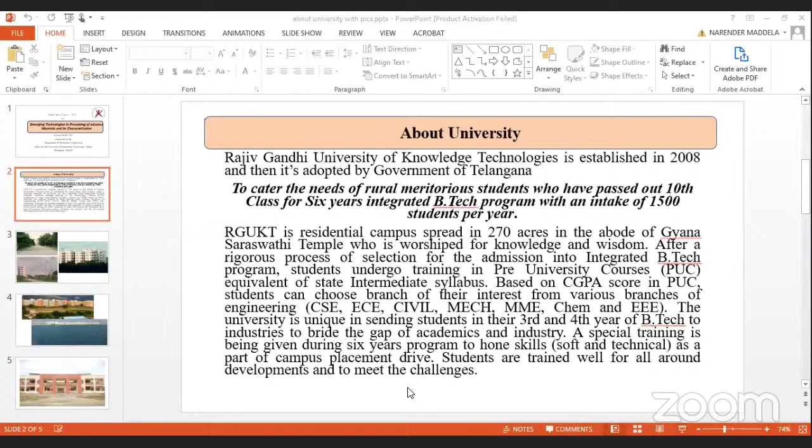Hello. Yeah, hello. Can you hear my voice? Yes, yes, we are able to hear you. In just another 2-3 minutes, we will try to start the program. Yeah, sure, thanks.

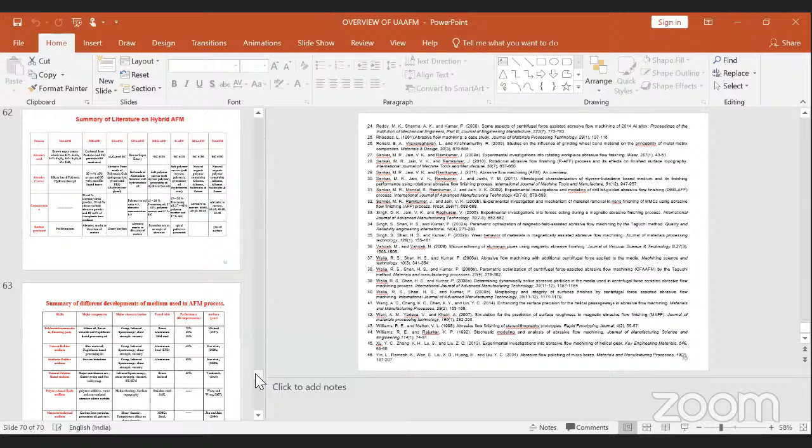Thank you. So, good afternoon, one and all. I would like to share my screen. Narendra sir, you stop sharing your screen so that I can share. Yes, sir. Venkatesh sir, you can now share your screen. Yeah, sure. Are you able to see my PPT? Yes, sir.

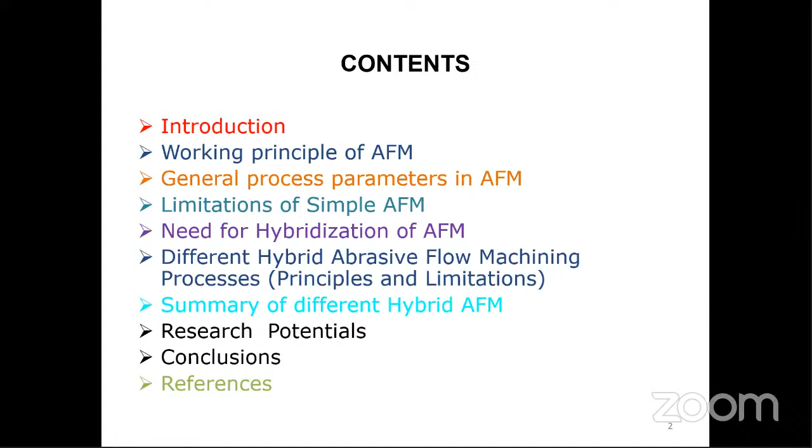So let me explain the principle of AFM. The principle of AFM is very simple. One can develop this setup at laboratory scale, in the machine tools lab or in a workshop. But its functioning and capabilities are really amazing. The principle is pumping an abrasive laden medium through or over the component to be finished, and the medium is pushed by means of two hydraulic cylinders.

Here in the figure you can see hydraulic cylinder 1 and hydraulic cylinder 2, which are connected to a hydraulic setup. We require two hydraulic cylinders placed opposite each other, and in between we have the tooling or fixture. The purpose of this tooling is that it holds the workpiece and also guides the abrasive laden medium to and fro through the target surface.

Here in the figure, this is the workpiece, fixed in the tooling. It looks like an external surface; it's a turbine blade, with some complex geometry involved. The tooling holds the workpiece and guides the medium through the target surface. If you take the inset of this workpiece, the abrasive laden medium consists of abrasive particles mixed with a viscoelastic carrier, and this carrier carries the abrasives and abrasion takes place.

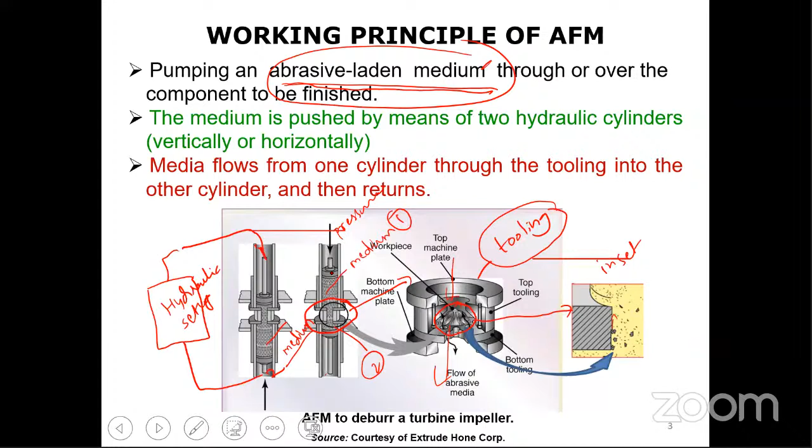So pumping the abrasive laden medium from one cylinder to another cylinder, passing through the target surface; once the medium travels from one cylinder to another, it is considered as one cycle. If you increase the number of cycles, your finishing will also increase.

Now let us see what that medium is in detail. The medium is the most critical component in this process. It is a combination of a viscoelastic carrier with special rheological properties. This viscoelastic carrier is something like silly putty, which we use for manufacturing toys, and also something like natural rubber, and you can also get synthetic rubbers from companies.

It is a viscoelastic polymer, a polymer with special rheological properties, meaning it is spillable in nature. If you put this polymer in a glass, it occupies the glass shape, and if you put it on a plate, it occupies the plate shape. So it is spillable in nature and very, very flexible.

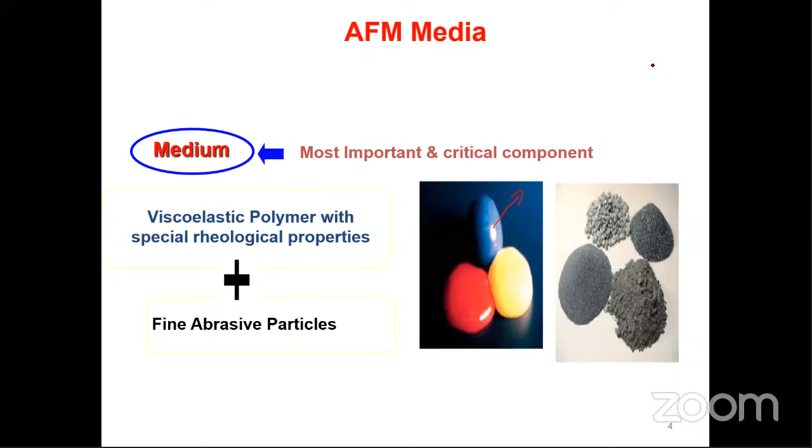We combine this polymer with abrasive particles. Generally used abrasive particles are silicon carbide and aluminum oxide, and we also use diamond powder for finishing advanced materials. You can see a realistic image where we prepared abrasive medium with these special rheological properties.

The commercially available polymer we call polyborosiloxane. It is made of silicone oil mixed with some chemicals. It behaves like rubber, viscoelastic in nature, and this material is mixed with abrasive particles so that it becomes a carrier for removing material, and it can travel through complex geometries, intricate geometries, and fine geometries like small micro slits and micro holes.

For example, we all know there is a small hole in a needle, right? If you want to finish that small hole, this is also possible. So micro holes can also be finished. AFM can be used for finishing, deburring, and radiusing. If you want to remove burrs, you can use the AFM process, and if you want to radius an already existing hole, you can use this AFM process.

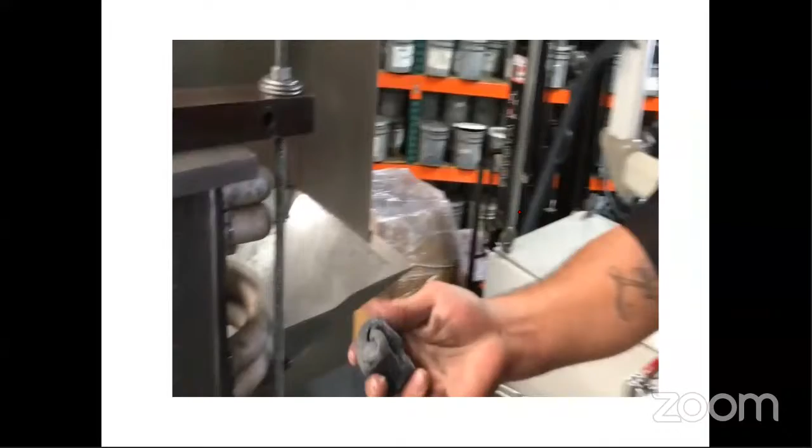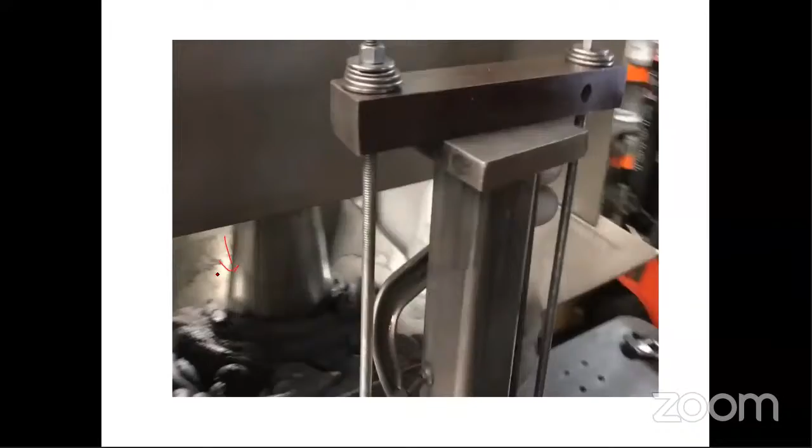So far we have discussed the principle of AFM and the main parts: the medium, the tooling, and the machine. In the working video, you can observe the behavior of the medium I am talking about. You can see the viscoelastic polymer mixed with the abrasive particles, and here they are pressurizing the medium, applying extrusion pressure for cleaning manifolds used in automobile components.

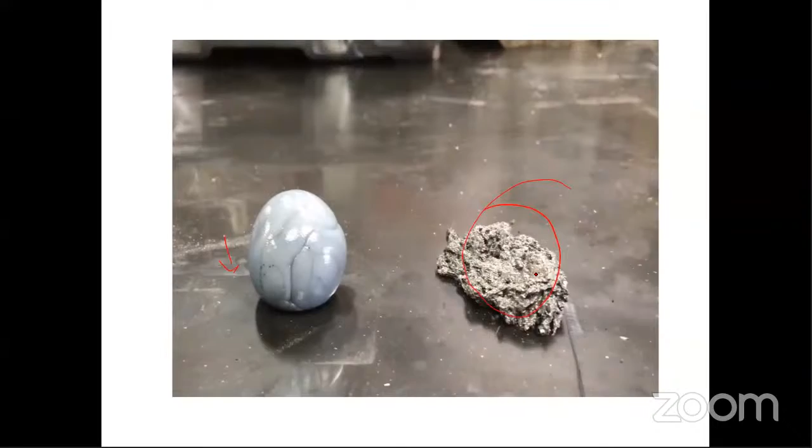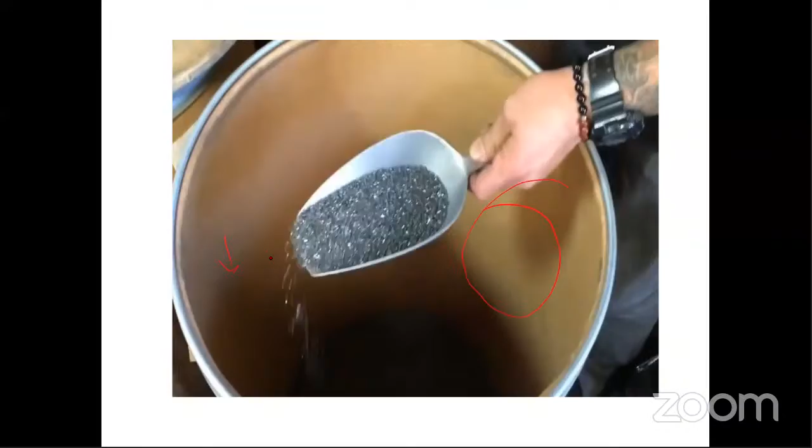So there are several grades of abrasive particles with different mesh size. So this is the polymer medium I am talking about, and this is after machining, and this is before machining. After machining, you can observe that it will be degraded, after doing proper abrasion. So these are the abrasive particles I am talking about.

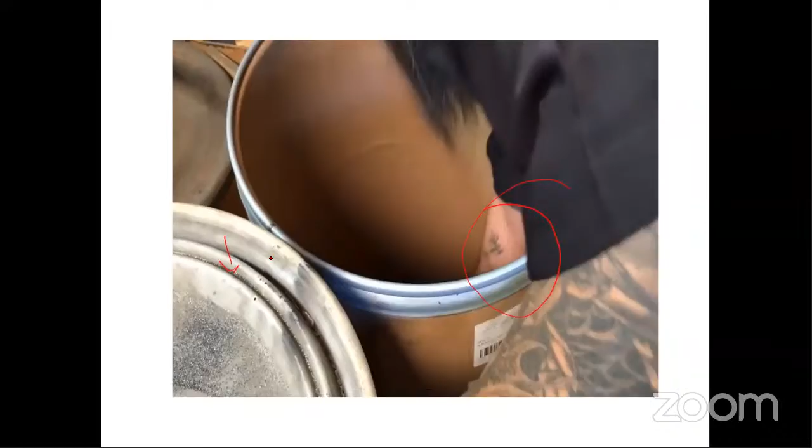So several grades are available at different mesh, like silicon carbide and aluminum oxide, which are very commonly used abrasives. So mesh size and concentration are some of the important parameters which influence the finishing. So these are fine silicon carbide particles.

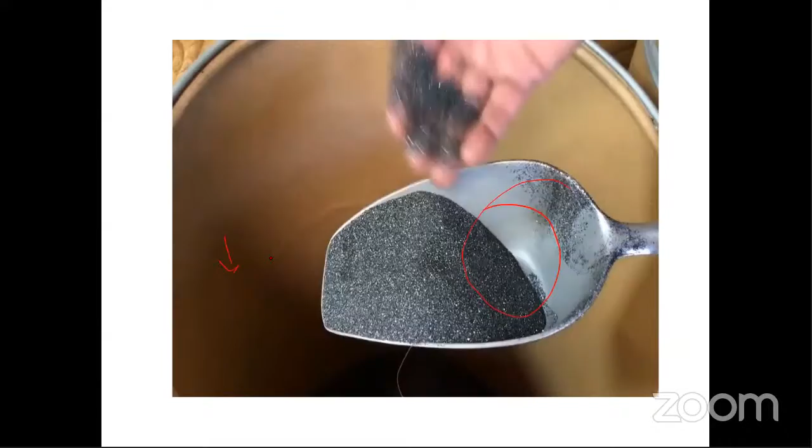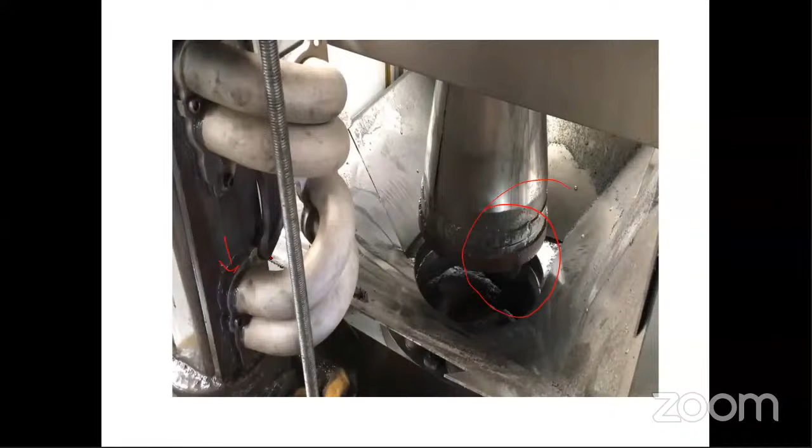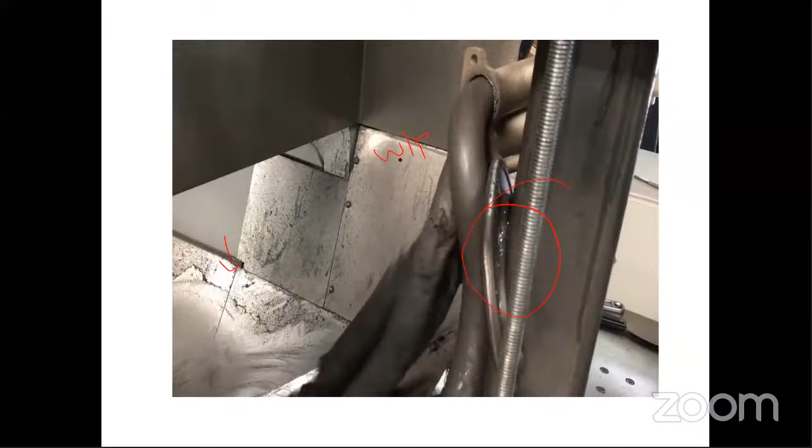Here you can see the performance, where this is applied and what is the actual function of it. So here, the medium is extruded by applying certain pressure, and the workpiece is here. In this video, the workpiece is a manifold, and you can see the media is extruded from the holes. We can say these are complex holes. These are not easy to

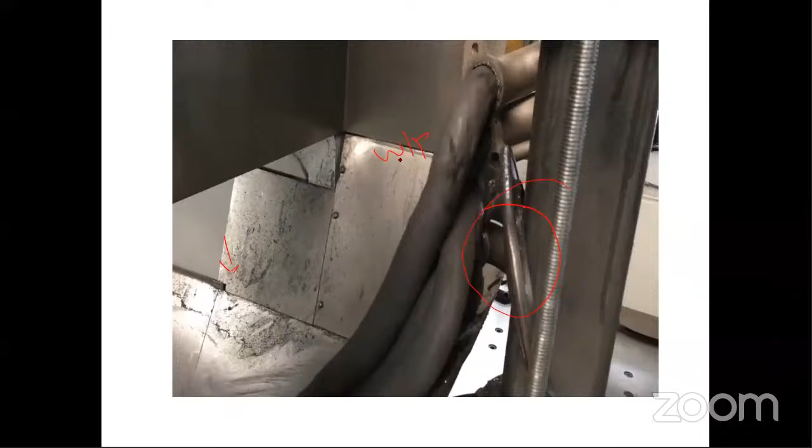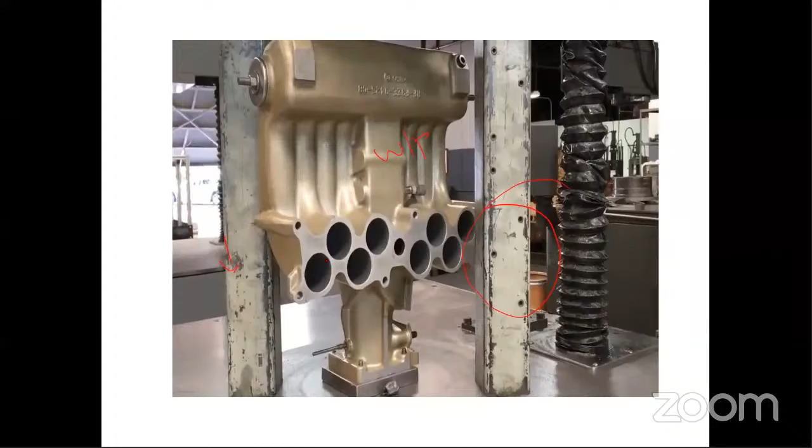finish using grinding, or it is radiusing the holes, and the metal which is removed from the workpiece is again mixed with this abrasive laden medium. So this is the final output. You can see the finishing before and after. So we all know the function of finishing, right? If the finishing is good, then the fatigue properties and creep properties will increase, and also the functionality of the product will increase.

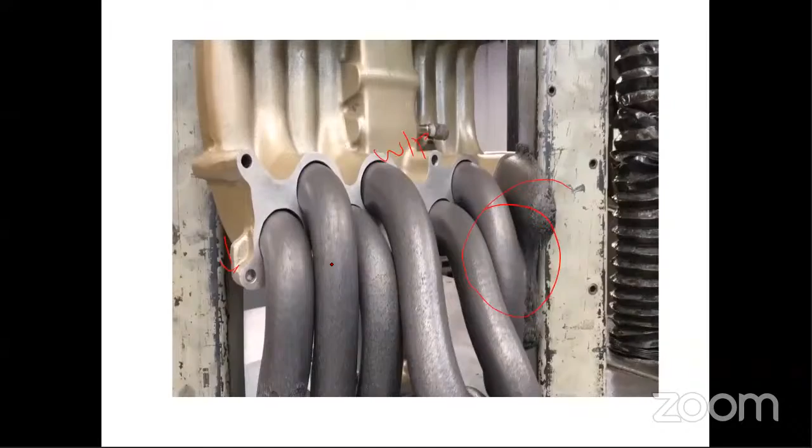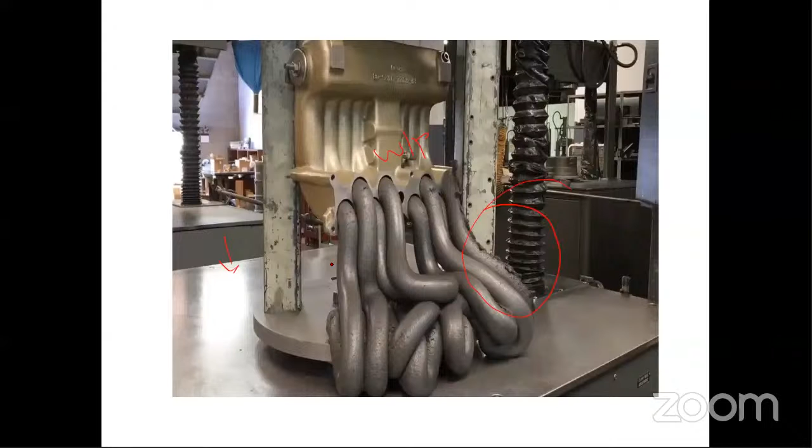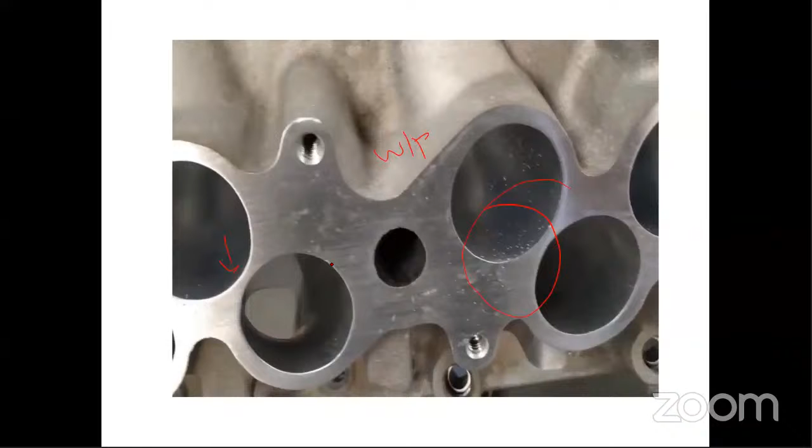Especially for parts used in automobiles, which are subjected to continuous loading, or parts used for medical implants, etc., where high-end finishing is required, finishing up to nano level, this process is very much applied. So here you can see the finishing before and after. There are multiple holes, irregular shape holes, and finishing at a stretch, radiusing and removing of burrs at a time, we can do using the AFM process. So this is one of the advantages.

So coming to the next important part, which I already discussed, that is tooling. Tooling is one of the important parts. It is generally for internal surfaces, and for external surfaces we need to develop separate tooling. So here you can see this cylindrical bush. Our target is to finish the internal geometry of this cylinder workpiece, and these are the tooling. These are used to hold the workpiece as well as to guide the medium through the target surface. And in this picture, this is for external surface. We developed this for the hybrid AFM process that we'll be discussing in the next slides.

So in this process, we have a restricted passage in order to get the advantage of pressure and velocity changes, and we got better finish by restricting the passage of medium, so that more pressure is applied and more finishing will take place. The material we generally use is nylon and Teflon for developing this tooling in order to finish the external and internal geometries.

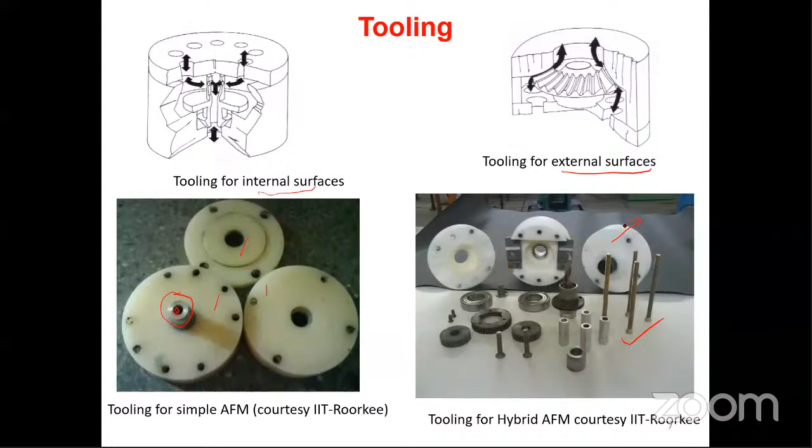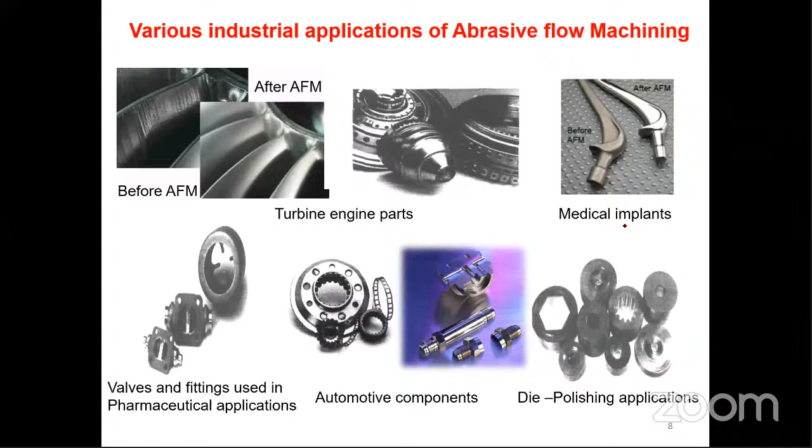So generally the various applications include turbine engine parts, medical implants, automotive components, die polishing applications, and aerospace applications, etc. AFM is very commonly used. What are the main important parameters in AFM? As I said, machine, medium and tooling, right? These three are the main parts in AFM.

So for machine related parameters, we can control extrusion pressure, number of cycles or processing time, and flow volume and its speed using the machining setup. And abrasive medium related parameters are medium viscosity. As we are using a semi-solid medium, the medium viscosity plays an important role in finishing. Also medium rheology, abrasive type, size, and concentration we are using for finishing.

And for tooling, the workpiece configuration, restricting passage length and area. As I said, if you restrict the passage, there will be a change in the pressure applied and velocity, and that gives rise to change in the finishing area. Next is workpiece hardness. So these are a few important process parameters in simple AFM.

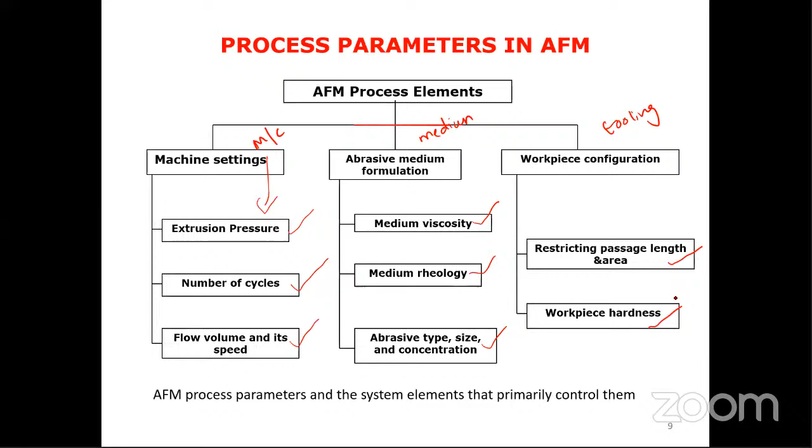So what are the advantages and limitations of the traditional AFM process? As I discussed, the major important part is to finish inaccessible areas, like we have seen the finishing of the manifold in the video.

Which is a part of an automobile car. So how to finish inaccessible areas? You can also finish the internal dimension of a nozzle, you can also finish a turbine blade, and you can also finish a blind hole.

There are many advantages of using AFM which cannot be achieved using traditional finishing processes such as honing, lapping, and grinding. Another advantage is finishing complex internal passages of components, and it saves up to 80% cost of final finishing compared to manual operation, and is easy to operate. Components can be finished with high tolerance. So these are the advantages.

And what are the limitations? One limitation is low material removal rate and low finishing rate, and it increases the processing time.

So even though AFM is a very good process which can finish inaccessible areas and complex geometries, it suffers from low finishing rate and low material removal rate. This means it takes a lot of time to finish, and the number of cycles required is more and more.

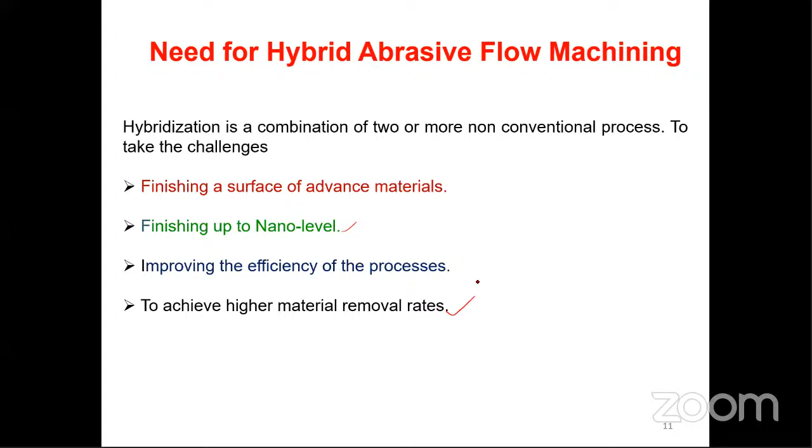Next, finishing up to the nano level. Initially AFM was used to go up to the micro level, and that can now go up to the nano level, even the Angstrom level. So they are working on reaching the nano level and Angstrom level, improving the efficiency of the process to achieve a higher material removal rate. These are the reasons why people started developing hybrid AFM processes.

And what literature is available on AFM and hybrid AFM? We now know what simple AFM is and its advantages, how it differs from other processes, what the important parts are, what the process parameters are, and what the applications and advantages are.

Let us see what this hybrid AFM is. Hybrid AFM is further divided into magnetic-based AFM, chemical-based AFM, centrifugal-based AFM, rotational-based AFM, and ultrasonic-based AFM. Hybridization means combining two or more energy sources in order to get an additional advantage by combining these processes.

Magnetic-based is further divided into magnetic assisted abrasive flow machining and magneto-rheological abrasive flow machining. Chemical-based includes electrochemical machining. Centrifugal-based includes spiral assisted abrasive flow machining and centrifugal assisted abrasive flow machining. Rotational-based includes rotational assisted abrasive flow machining. And ultrasonic-based includes ultrasonic assisted abrasive flow machining and ultrasonic flow polishing.

Now let us see one by one what the advantage of each process is, what the principle of these processes is, and how the finishing rate and material removal rate have been increased using these processes. We'll discuss.

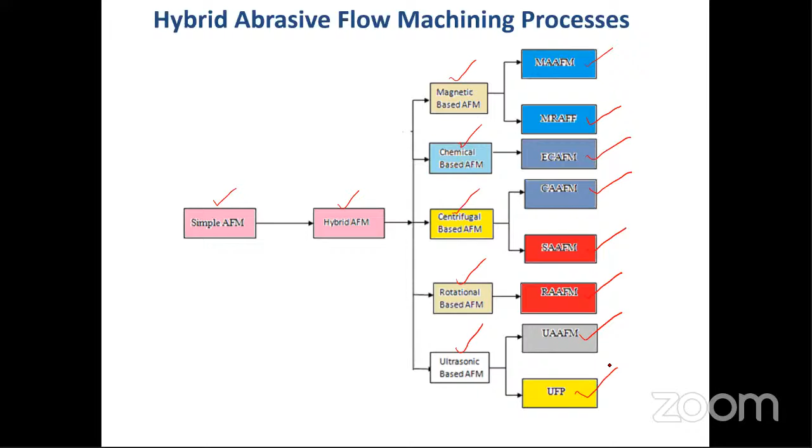First, Jones and Hull in 1998 introduced ultrasonic flow polishing. Actually, AFM was first developed in the 1960s by Extrude Hone Corporation, USA. After that, the first variant came in 1998, when ultrasonic energy was incorporated with AFM, combining AFM and USM, which he called ultrasonic flow polishing. In this process, the abrasive polymer mix is pumped down the center of an ultrasonically energized tool.

The principle is simple. He pressurized the medium using an extrusion pressure, and also actuated the medium using an ultrasonic tool. He energized the medium by giving ultrasonic vibrations to it, and achieved better results compared to simple AFM. He also recorded a better material removal rate compared to simple AFM in his research work.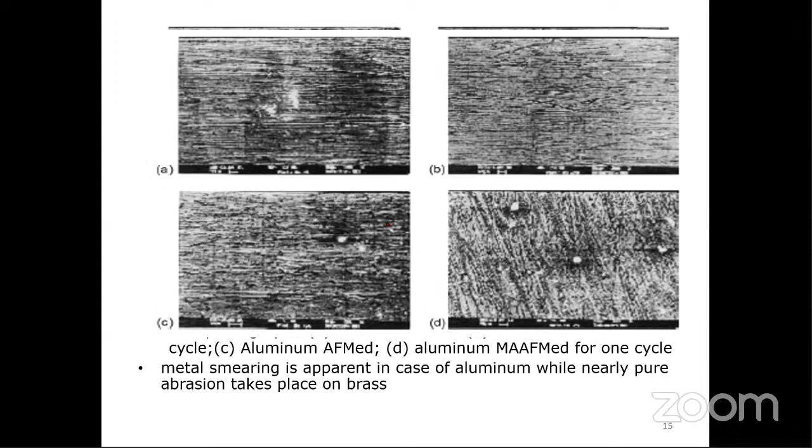Magnetic field is applied using electromagnet coils, and the difference is here. Due to the magnetic field applied, CIP chain formation takes place, which improves the active abrasive grain density in this process. If the abrasive grain density increases, then the finishing rate also increases.

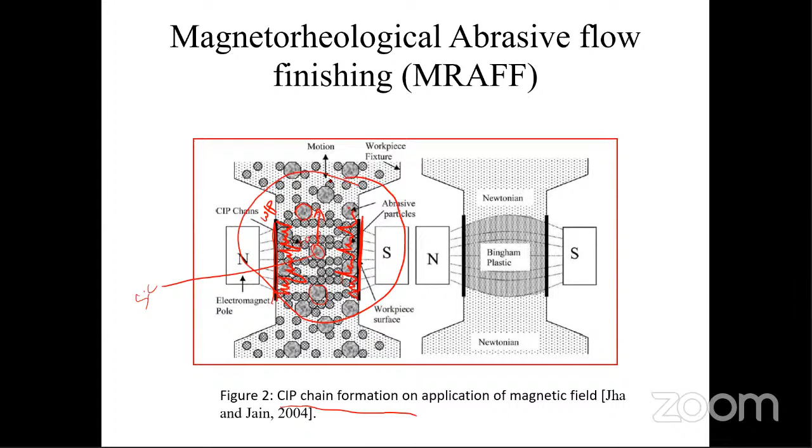Here you can see the abrasive particle and the chip flow direction, and this is the asperity I'm talking about. So this CIP chain will help increase the axial force as well as the radial force. So the resultant has increased, and you can see the microchip cutting of the abrasive particle with the surrounding carbonyl iron particles, which leads to higher material removal rate and higher finishing rate.

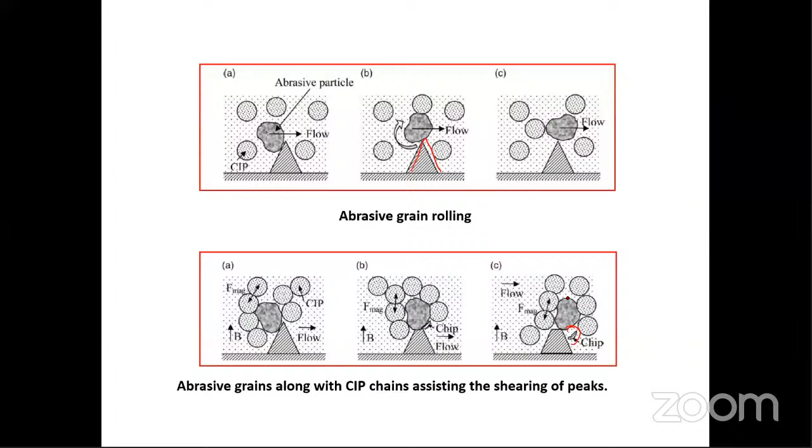Next is rotary abrasive flow machining. So he has used one spindle, inserted it in the medium, and rotated that spindle. The other principle is simple: it consists of two hydraulic cylinders passing the medium from one cylinder to another. The remaining principle stays the same. The difference is he used one spindle and rotated it, and due to this rotary action, the protrusions of the abrasives are everywhere, and the abrasive interaction with respect to asperity has increased due to this continuous rotation of the spindle inserted into the medium.

Next, another scholar in the year 2006 introduced a centrifugal force. This is one of the tricky processes. You can see he designed a lot on the tooling. He did not use any magnetic field. He developed a special tooling for this centrifugal assisted abrasive flow machining, and introduced centrifugal force around the tooling, and due to that centrifugal force, the abrasive interaction with respect to asperities has increased.

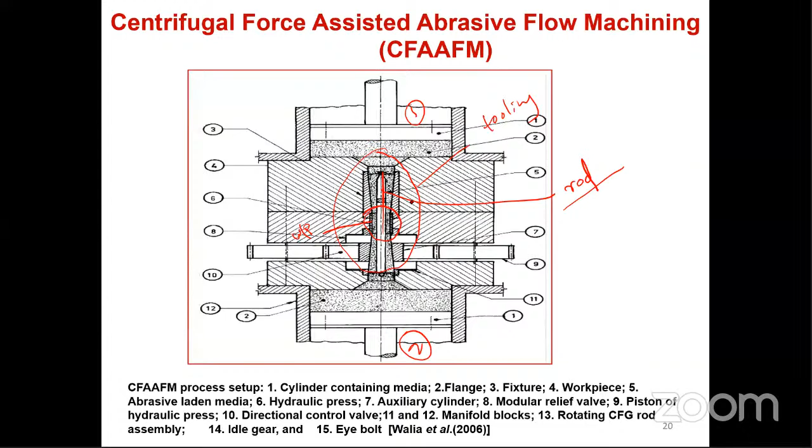They rotated this centrifugal rod, and due to the rotation, centrifugal force has been generated, and there is more concentration of abrasives towards the target surface. Here you can see the centrifugal rod, and this is your workpiece. They rotated this centrifugal rod, centrifugal force has been generated, and due to that there is more interaction of abrasives towards the asperities, and the finishing rate has increased, and the material removal rate also improved compared to the simple AFM process.

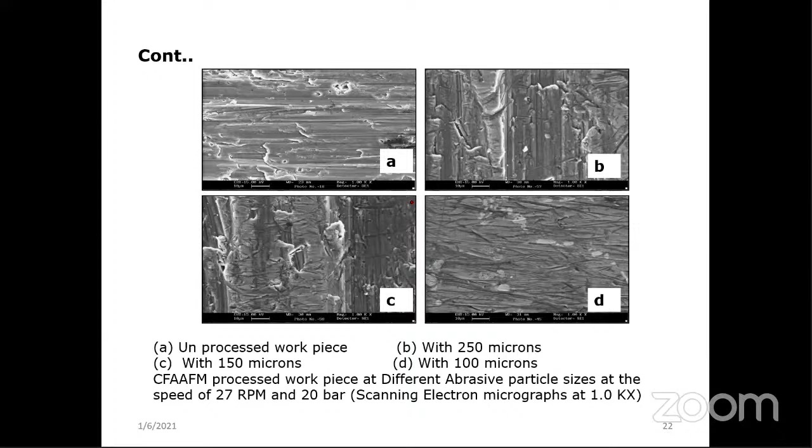Coming to next, drill bit guided abrasive flow machining. In the previous case, we saw they used a centrifugal rod. One important thing I forgot to mention is they changed the shape of the rod and explored the effect on finishing as well as machining. They also varied the speed of the centrifugal rod in RPM, exploring the variation in finishing and material removal rate.

In the previous case, magnetic assisted abrasive flow machining, they explored magnetic flux density. They changed the voltage, and by changing the voltage, they explored finishing rate as well as material removal rate. So for every hybrid process, if you observe, there are some new parameters introduced. Those parameters we call hybrid parameters, and the influence of these parameters will be the novelty in the field.

Yeah, drill bit guided. So instead of centrifugal rod, here in this process they introduce a drill bit into the medium. So what happens if you introduce a drill bit into the medium? When AFM is on, when you are pressurizing the medium from one cylinder to another cylinder, what happens? So just assume this is our workpiece. Here we have asperities, and here we have asperities. So our target is to finish this.

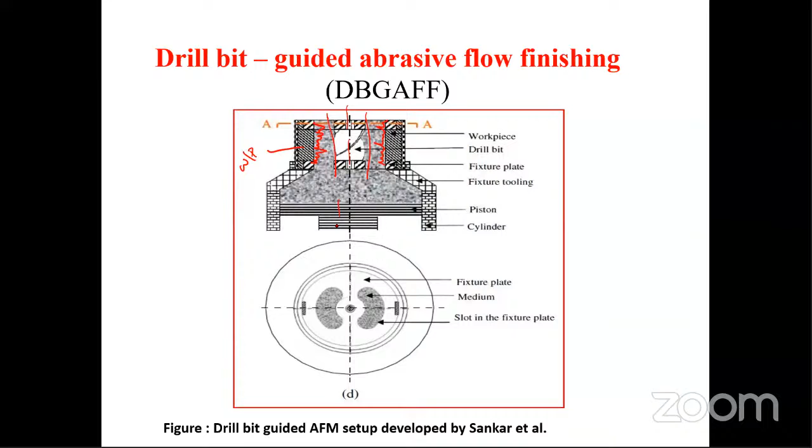Say we have introduced a drill bit here. So then what happens actually? So drill bit guided abrasive flow machining. We all know the helical flute structure of the drill bit, how it helps in AFM. When you are pressurizing the medium, there is the flow along the flute path, the reciprocating axial flow, and the scooping flow. These three are possible when you insert a drill bit inside the AFM process, when you are finishing a cylindrical bush.

If you have not inserted a drill bit, then the particle will simply move in one direction, right? The particle will just move from one cylinder to another cylinder. Maybe some particles may hit and some particles may simply slide and become inactive. However, if you insert this drill bit, then due to the helical flute structure of the drill bit, the flow along the flute path, the reciprocating axial flow, and the scooping flow are possible, which leads to more interaction of abrasives with the asperities, right?

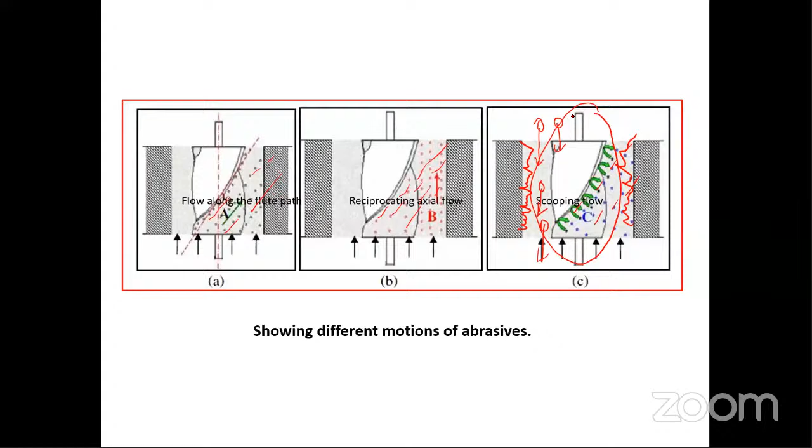So our target is to improve the finishing rate and the material removal rate and to work on advanced materials, right? And also, by introducing this drill bit or centrifugal rod, the passage is restricted. If the passage is restricted, it increases the finishing, because the medium is pressurized to flow on the target surface. If more pressure is applied, there will be more cutting action and more finishing action. So these are the things that happen while working on drill bit guided abrasive flow machining.

If you are not rotating, then there won't be any helical path or any separate action. There will only be a to and fro action, and due to that some particles may be active, some may not, and it takes a lot of time for finishing. However, if you introduce mechanisms such as rotating the workpiece tooling, introducing a drill bit or a centrifugal rod, changing the shape of the rod, or introducing a magnetic field around the tooling, all this hybridization helped AFM improve its finishing rate.

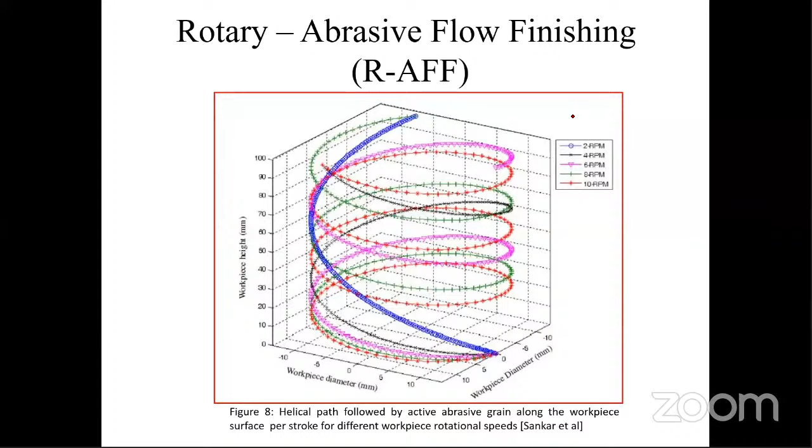Let us see the next scholar in the year 2010. He introduced spiral flow assisted abrasive flow machining. In drill bit guided abrasive flow machining, the drill bit was introduced but not rotated. Whereas in spiral flow, he introduced the drill bit in the workpiece zone and also rotated it. This rotation acts like a flushing element, energizes the abrasive particles inside the medium, and gives you the scooping flow and helical flow, etc.

What he claimed is, instead of simply putting the drill bit, if you rotate it at an optimum RPM, a centrifugal force is generated, the scooping flow and helical flow of the drill bit help a lot, there is active abrasive grain density, and restriction of the passage is also possible by introducing the drill bit inside the workpiece. Our target is to finish this integral bush, and that is successfully done using spiral flow assisted abrasive flow machining.

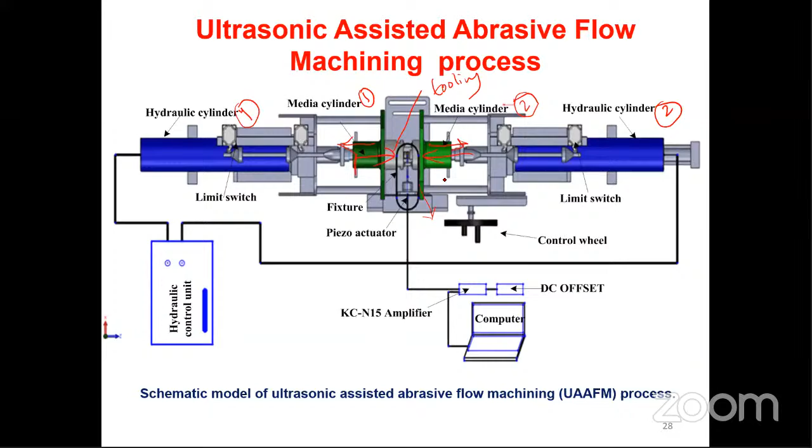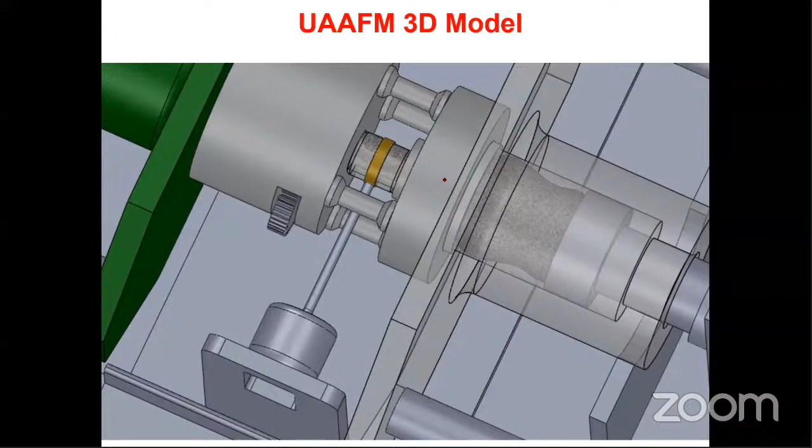So this is developed in IIT Roorkee. So here you can see first the design model is developed. Here you can see the medium. So this is a 3D model developed in SolidWorks. Here you can see the piezo actuator, how it is mounted and how the workpiece is vibrated. And similarly, parallelly, how the medium is extruded from one cylinder to another cylinder.

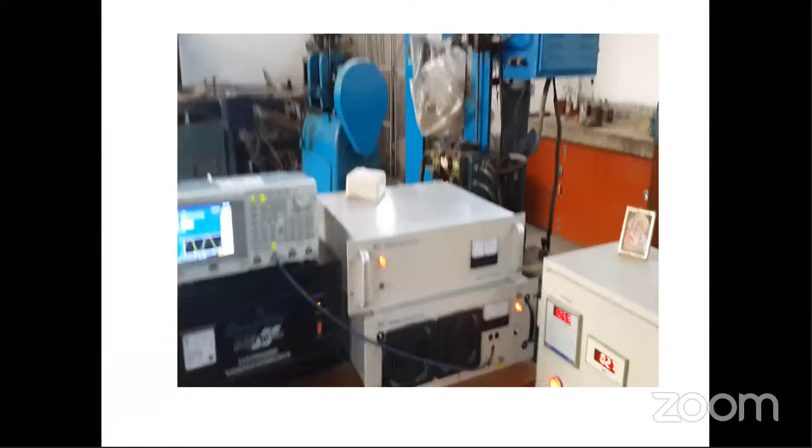So here in this case, the vibration is in the radial direction, perpendicular to the media flow direction. By mounting the actuator in axial mode, we can vibrate in the axial direction as well. So this is a model we have developed, and after that, the setup we have developed in IIT Roorkee. Here you can see this is the function generator and KC-N15 amplifier. These amplifiers are for giving vibrations.

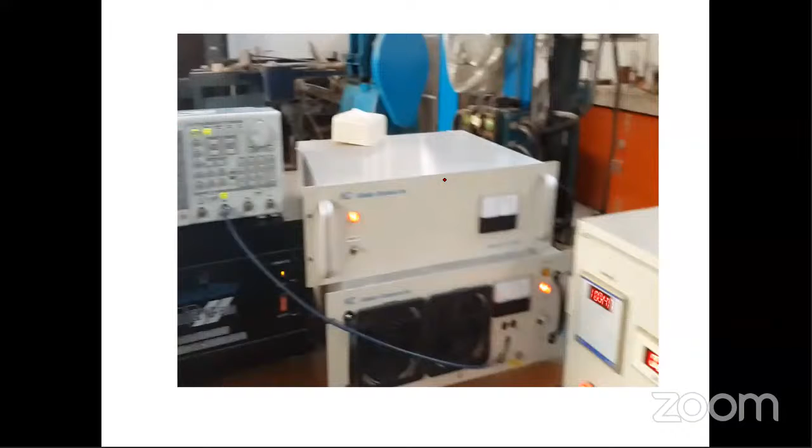So we have a piezo actuator. This is the hydraulic cylinder I'm talking about, cylinder 1. This is a medium cylinder. This is the tooling I'm talking about, and this is the actuator. And here you can see the medium which is collected, which is leaked from the piston, from the fixture. So you can see how the actuator is mounted and how the medium is pressurized. Piston, and the green color part is the medium cylinder, and this is the medium collected here.

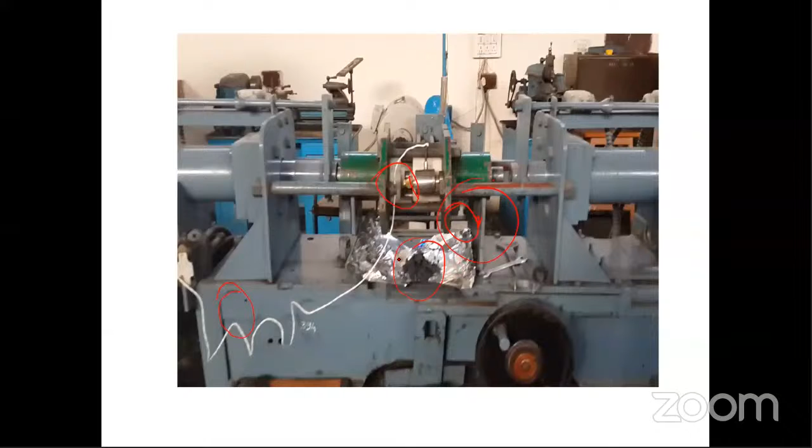So the additional thing we are doing here is we are vibrating the workpiece externally when the two-way AFM process is on. Let us see what happens if you vibrate the workpiece. Why actually the surface finish is increased, why the finishing rate has been increased, why the material removal rate is also better compared to the simple AFM process.

So let us take a simple schematic illustration. This is a cylindrical bush, and our target is to finish this internal geometry of the cylinder. And these are the asperities of the workpiece. And remember that we are working on a finishing process. So the initial roughness we consider will be 1 micron or less than that, and we reach up to nano level by using these advanced finishing processes.

It means we can't take a very rough surface, say 10 micrometer, 20 micrometer, because there are many other processes to finish those rough surfaces, and also while manufacturing itself, we take utmost care to get a near net shape product, right? These processes are secondary processes which can finish up to nano level for certain applications.

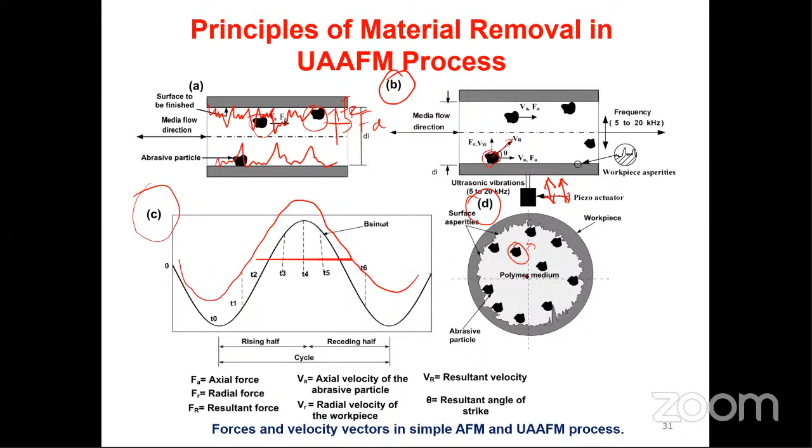So in the fourth figure you can see that the abrasive protrusions are everywhere throughout the surface for finishing and for removing the material, right? So let us see now the other figure, with and without vibration. So this is without vibration. This is with vibration.

So what happens actually? In case A, if the vibration is not given, then we can say that this is a simple AFM. In case B, if the vibration is given, you can see a slight enhancement of the asperities because your workpiece is vibrating at high frequency with a certain amplitude, say 10 micrometer amplitude. So the enhancement of the asperities in the rising half and receding half leads to a certain change in the distance, that amplitude, right?

Due to that, the abrasive particles which are inactive will also become active due to the enhancement. For example, this particle may not be active here, whereas due to the vibrations given to the workpiece, the inactive particles are also becoming active, and the particle is hitting at an angle theta and they are traveling unidirectionally because of the vibrations given externally to the workpiece.

So there is more active abrasive grain density. That means there is more interaction of abrasives with the asperities, and that is the reason the finishing rate has increased, and also the material removal rate is better compared to the simple AFM process.

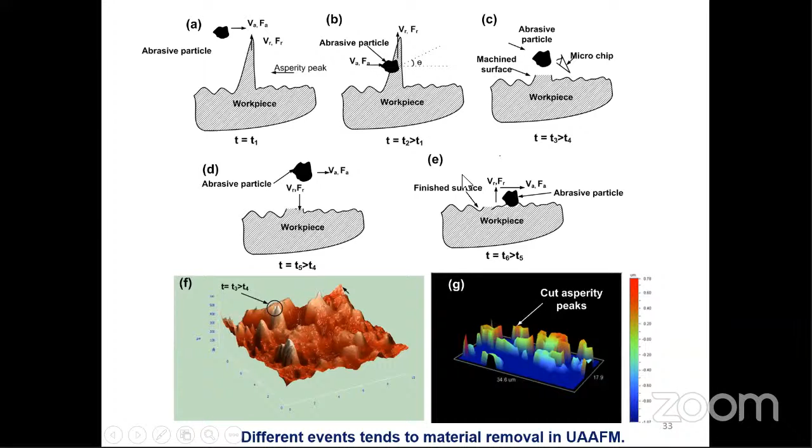So this is another case. This slide shows the axial direction. In the previous case, we were vibrating the workpiece in the radial direction, and we recorded the changes of the sinusoidal cycle and how the abrasive and the asperities interacted, etc. Whereas in this case, when you are vibrating the workpiece in the axial direction, what happens actually?

So here you can see the advancement of the asperities, meaning the asperities are advanced and then come back again within this 10 amplitude, whereas the abrasive particles are also becoming more active, and the finishing rate is further increased using this axial mode of the UAAFM process. Whereas material removal rate is much better in radial, because the radial force leads to more indentation of the abrasive particle into the asperity on the workpiece surface. So for better removal rate, radial mode is suitable, but for better finishing, the axial mode is suitable in the UAAFM process.

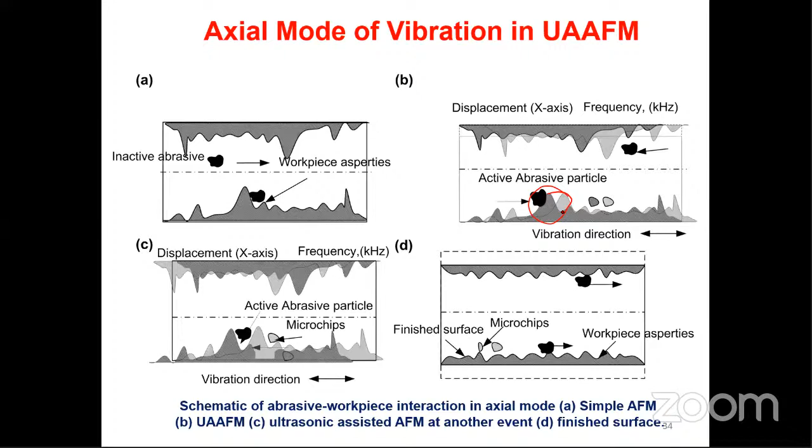So we have done a few simulation studies in the AFM process by doing CFD analysis of the medium flowing inside the workpiece: how the pressure distribution, velocity distribution, and temperature distribution take place when the workpiece is subjected to vibration. Why? Because in simple AFM, we all know how the pressure distribution takes place, how the temperature of the medium behaves, and the pressure and velocity distribution.

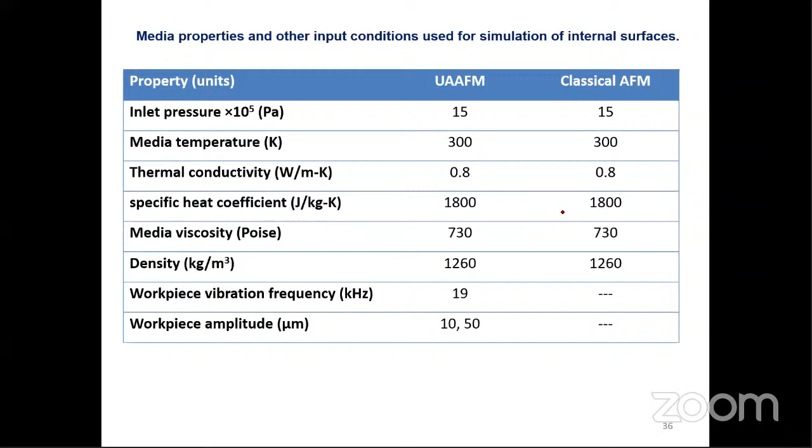Whereas when you are advancing the technology by adding two or more processes, when you are hybridizing the process, it's an obvious need to understand the analysis part: how the temperature will behave, and how the velocity and the pressure will vary when the workpiece is subjected to vibration. So these are the few medium properties and parameters we incorporated for simulation purposes before doing the experiments. So this is the grid independence test.

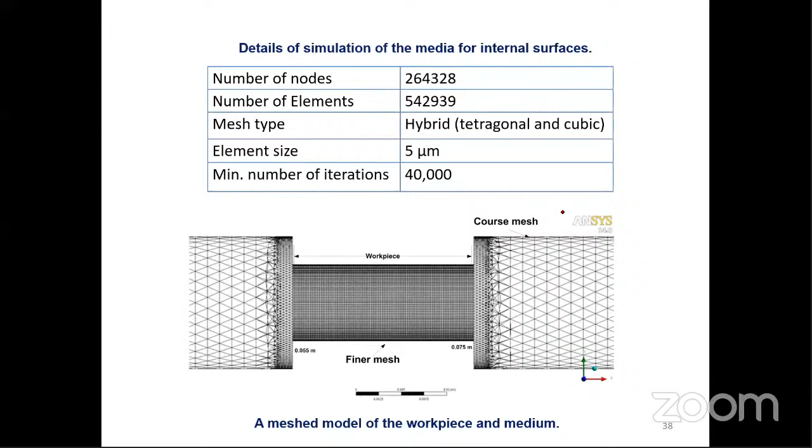So for using, you can see the number of elements used, the grid size, the pressure applied, the size, shape of the grid used, everything is given here. The number of nodes, number of elements used, type, tetragonal, cubic, and element size, number of iterations. So all those things are given. So this part, basically, is simulated, and the main concentration is this.

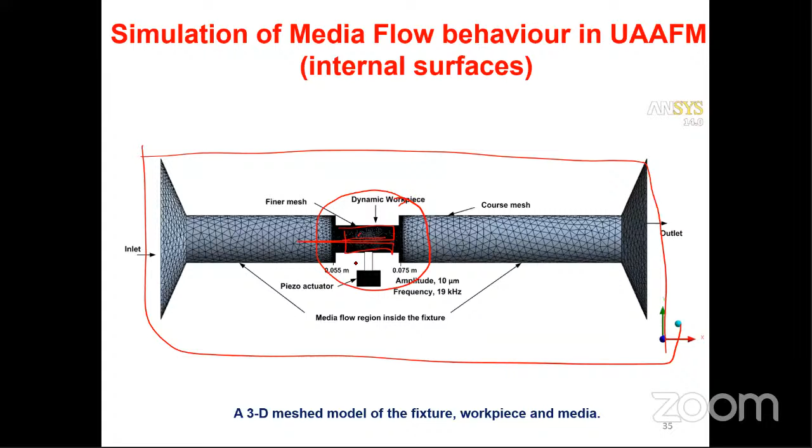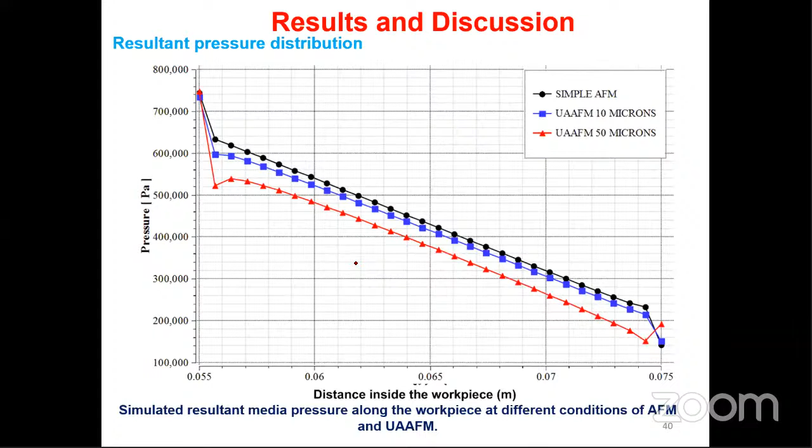So in the simulation we have understood that there is not much influence of the amplitude. We worked on different amplitudes, and we observed that there is not much influence on pressure and velocity distribution by varying the amplitude. However, the vibration given to the workpiece has a lot of influence on pressure distribution as well as velocity distribution and temperature. Temperature, there is not much change.

So why we bother about temperature is, generally when the temperature increases, since we are using a semi-solid media, the stability of the media goes down, right? If the stability is not there, then the particles present in the media may not be active. So that's why the thermal degradation of the media is important. Thermal stability of the media is important. So for that, we have done simulation and also correlated it with some experimental results.

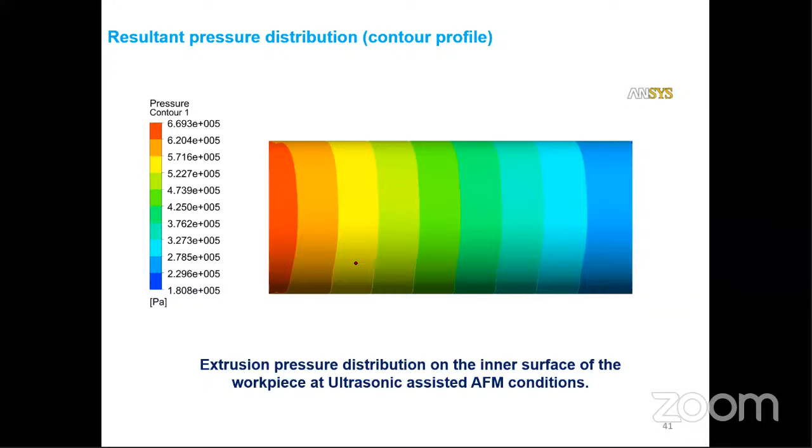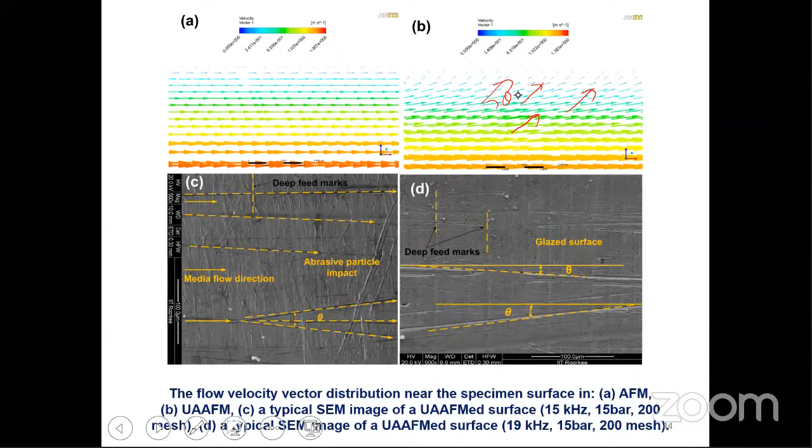So here we have slightly correlated the protrusions of abrasive particles with the results we got from the simulation. So here you can see the velocity vectors hitting at an angle theta, and similarly you can observe the abrasive scratches on the workpiece, the tendency of an abrasive particle hitting at an angle theta.

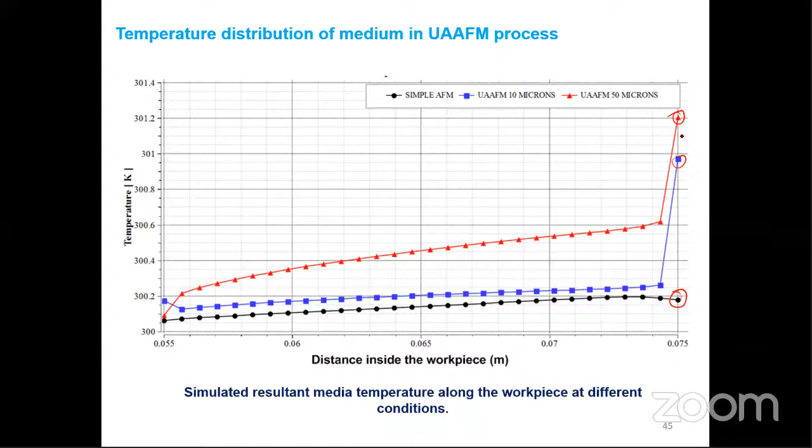So why we study temperature is, as I said, if you vibrate the workpiece externally at 20 kilohertz, we are curious to know whether the temperature increases. But we understand that there is not much increase in temperature. So the process is safe. We can vibrate the workpiece while doing AFM. So we have studied a comparison between the temperature distribution result of the media as well as the thermogravimetric analysis of the medium.

And we also worked on one external workpiece. Whatever we have seen now is while working on a cylindrical bush, and now these are on a bevel gear. So we have developed one fixture for the bevel gear, and we took the bevel gear because it has complex geometry, and finishing a bevel gear is not that easy. There are only a few processes, such as gear hobbing and electrochemical honing.

So they make one dummy bevel gear, contact the workpiece bevel gear with the dummy bevel gear, and do electrochemical honing, right? So AFM is also one of the alternate processes for finishing gears. You can finish helical gears, you can finish bevel gears. The only thing is you need to develop proper tooling, a suitable fixture for your bevel gear.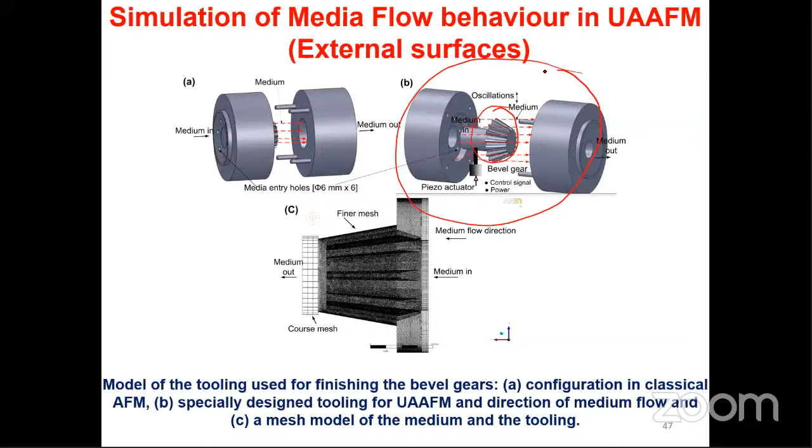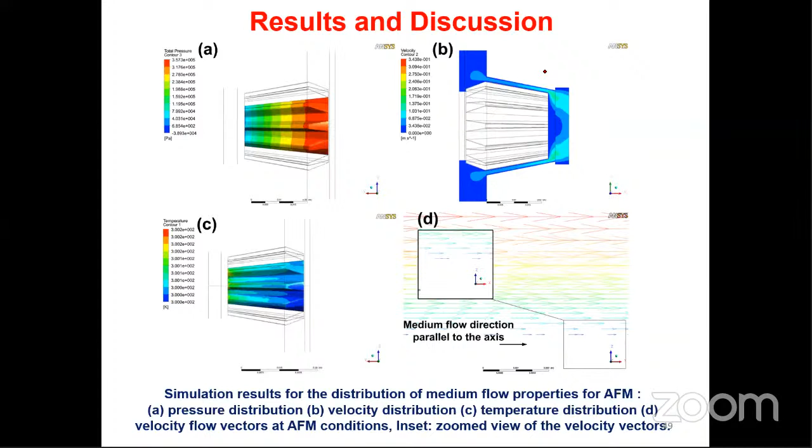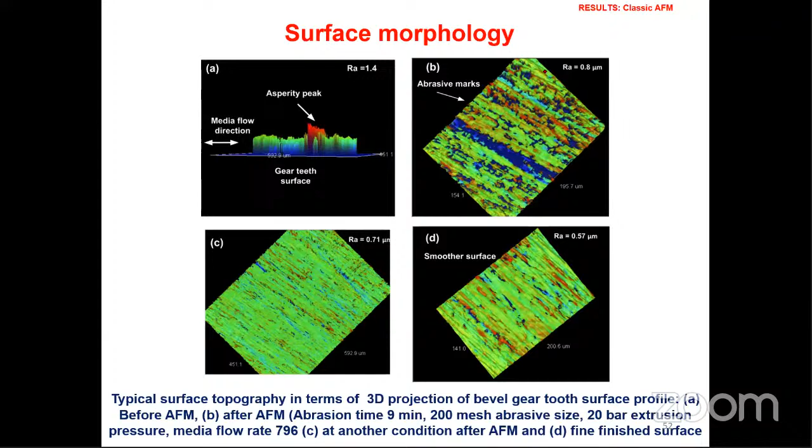Next, one important case study I would like to present here is while working on bevel gear. We can see here the design of the fixture inside the bevel gear. Here you can see it is in taper, and here you can see there are some holes where we are guiding the medium to pass through the bevel gear teeth, and also the small hole in the fixture, and how we incorporated the

vibrations to the bevel gear, how we have given the amplitude, how we have designed, and how we have taken care of leakage of the medium. All these are tricky in the process, right? In the remaining process, the AFM will be on and we also vibrate the workpiece externally, and there will obviously be abrasive laden medium on the workpiece, and you can remove the burrs, etc.

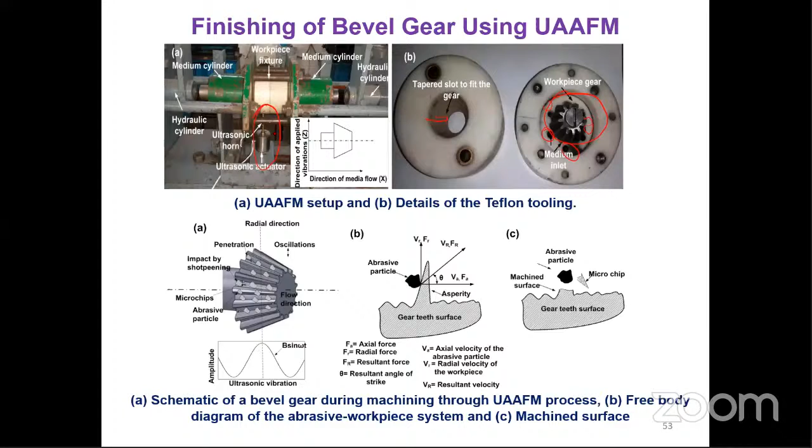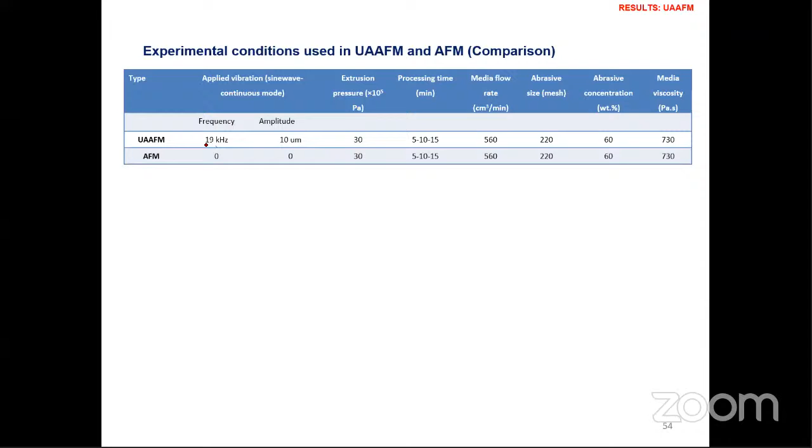So we have made one small study using UAAFM and AFM: without vibration, that is simple AFM, and with vibration. We selected 19 kilohertz as the optimum vibration by pilot experimentation, and 10 micron amplitude we fixed as constant, because in simulation we observed that changing the amplitude does not make much difference, and here it will be 0. The extrusion pressure applied is 30 bars, kept constant for both cases, and processing time also kept the same: 5, 10, 15 minutes in UAAFM and 5, 10, 15 in AFM.

Media flow rate is kept the same. Abrasive size is the same for both UAAFM and AFM. Abrasive concentration is 60% abrasives in 100% of abrasive laden media, meaning the other 40% is the viscoelastic polymer and polymer gel mixed with the abrasive particles. Media viscosity is measured as 730 Pascal second, based on the pilot experimentation.

So what interesting result did we find here? Our main outputs are surface finish improvement, so we are finishing the surface up to micro level, nano level, and the other output is material removal, right? How much material is removed and what the material removal rate is. This black line shows simple AFM, and this shows UAAFM.

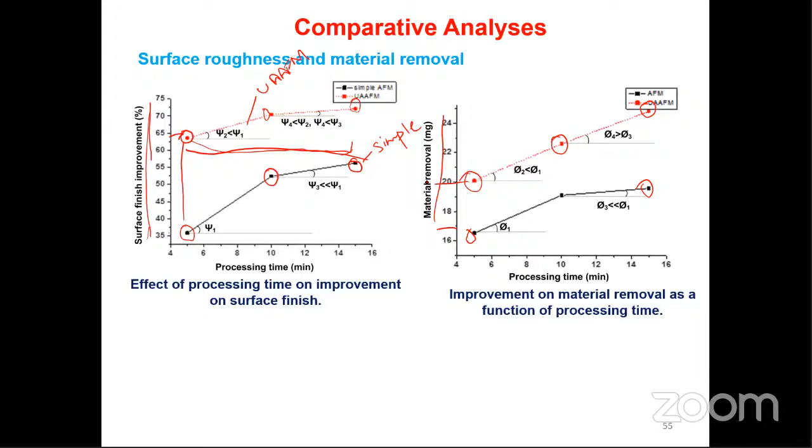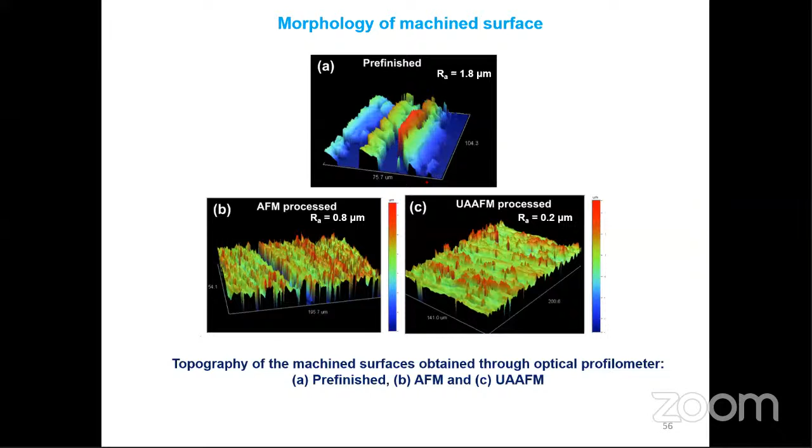These are a few surface morphologies taken before and after processing using AFM and UAAFM. You can see the Ra values also from the study. Here you can see the gear before and after finishing. This is a rough surface observed on the gear, with deep feed marks on the gear workpiece. After UAAFM, you can observe a smooth surface finish on the gear.

And we have taken many values at different levels using an optical profilometer as well as a profilometer for taking the Ra values.

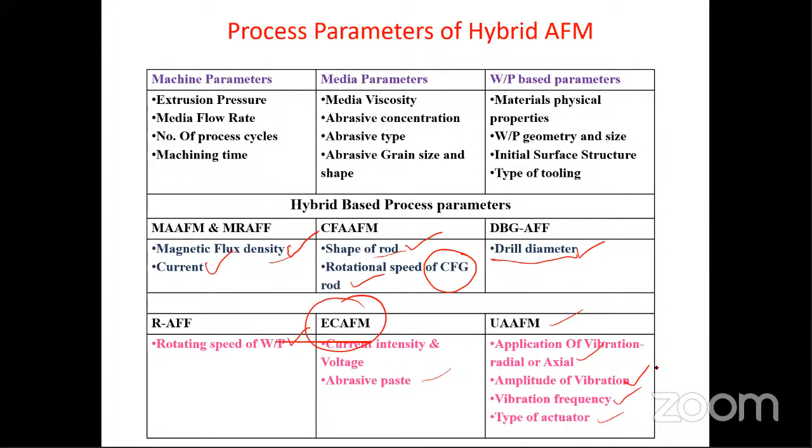So these are a few summarized parameters newly implemented in AFM process variants. Now if you see the broad classifications of the AFM process, in shop floor AFM you have the simple one way and two way AFM.

Orbital AFM uses orbital vibrations for finishing, and hybrid AFM includes magnetic assisted, magnetorheological, ultrasonic flow polishing, centrifugal assisted abrasive flow machining, rotary assisted abrasive flow machining, and ultrasonic assisted abrasive flow machining. There are various variants, and you can represent the parameters acting on each as a tree diagram.

So these are the input process parameters, and these are the output responses. Majorly, people have worked on surface finish improvement and metal removal.

However, people can also work on surface integrity properties. They can work on cylindricity, removal of burrs through deburring, and on flatness — you can check the flatness of the workpiece.

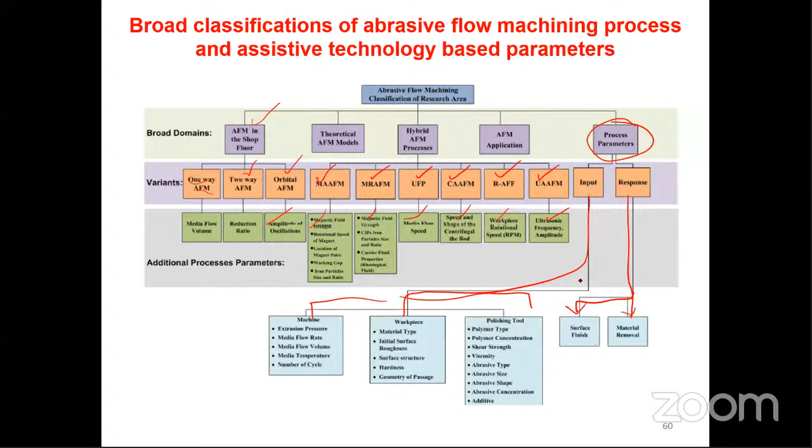One can work on residual stresses developed like after using UAFM process or AFM process. So there is a lot of scope in developing the responses in AFM.

In AFM, there are always two scopes. One is product development and the other one is process development. Product development means the major parts of the product - the machine or tooling, medium used, flexible medium, and the machining setup. One can develop a new flexible tooling which can be used for different materials, for holding different shapes, say internal and external. And one can patent a flexible tooling in the AFM process.

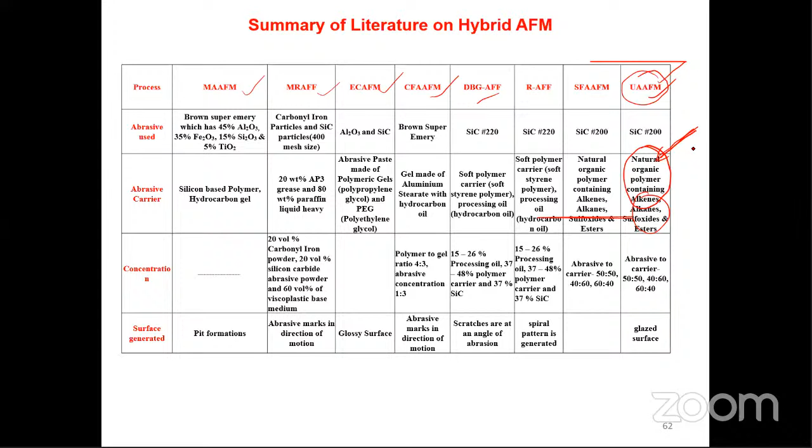So if I summarize the mediums used - we developed this during my master's. There are many people working on developing alternate mediums, like Michael, Kar et al. They have used natural rubber. Some people have used rubber in a form of milk, mixed with abrasive particles, using various gels to prepare the medium. In my case, some people worked on wax, mixing it with abrasive particles. And some people just used simple silly putty mixed with abrasive particles.

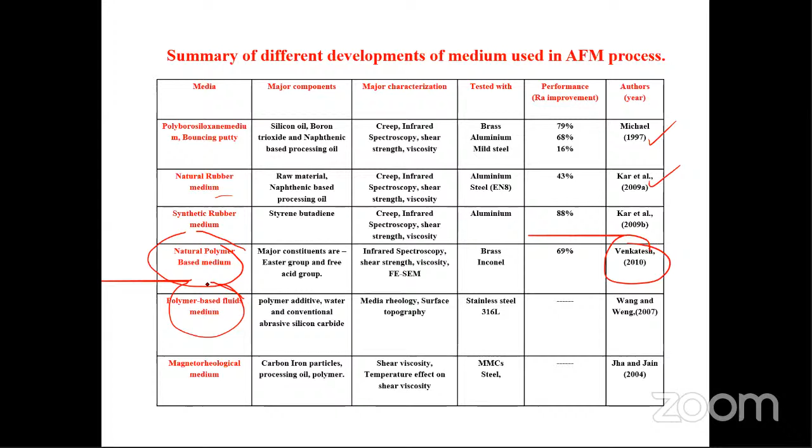People have developed magnetorheological medium, polymer based fluids - many organic and inorganic components mixed in order to get better properties of the medium. So this slide shows the summary of different developed mediums in AFM. Coming to capabilities - what are the capabilities?

The main outcomes are machining, finishing, and material removal. Various authors worked on different materials and achieved better surface finish and better RA. In our case, with UFM on Inconel 718, we achieved 0.09 micrometer surface finish and 10.93 milligrams of material removed.

Even though we can't directly compare with other processes because the material may be different and they have used advanced materials, the finishing obtained by using the UFM process is better compared to the other processes.

We also have some unique advantages using the UFM process. For example, in magnetic field assisted finishing you have to apply a magnetic field, and in CAFM a drill bit guided rod is used, which is limited to cylindrical bushes only, because you can't insert a rod everywhere and rotate it. So if you want to finish a turbine blade, you can't insert a centrifugal rod or a drill bit and rotate it.

In rotary AFM, for example, if your tooling is very big, then you can't rotate that big tooling. Whereas in UFM, the only thing you have to do is vibrate, whether it is a flat workpiece, complex geometry, external workpiece, or internal workpiece. You only need to vibrate the workpiece externally. How to vibrate it externally is the tricky part, but it gives a bit of advantage compared to the other processes.

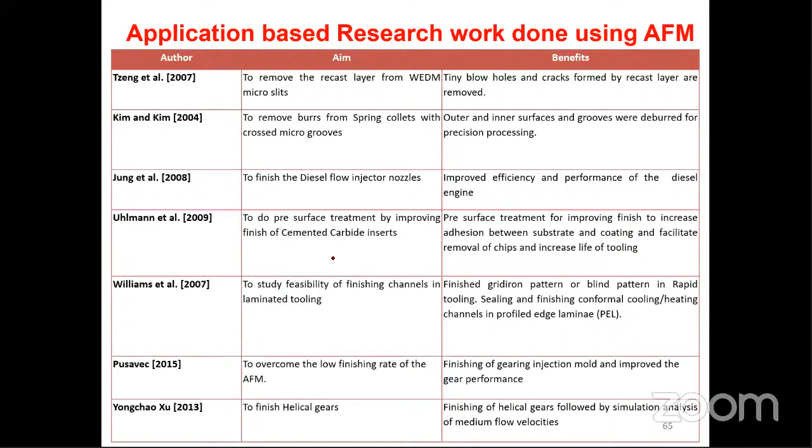Whether it is EDM, ECM, or any other process, you can contribute by taking an application-based workpiece, and you can correlate and compare the results with existing ones.

However, there is a lot of research scope in the AFM process, especially in terms of developing a flexible tooling process, because every time you change the workpiece, you need a separate tooling for fixing the workpiece and for guiding the medium flow. So this is a big challenge, and we can develop a flexible tooling as well as optimize the process parameters.

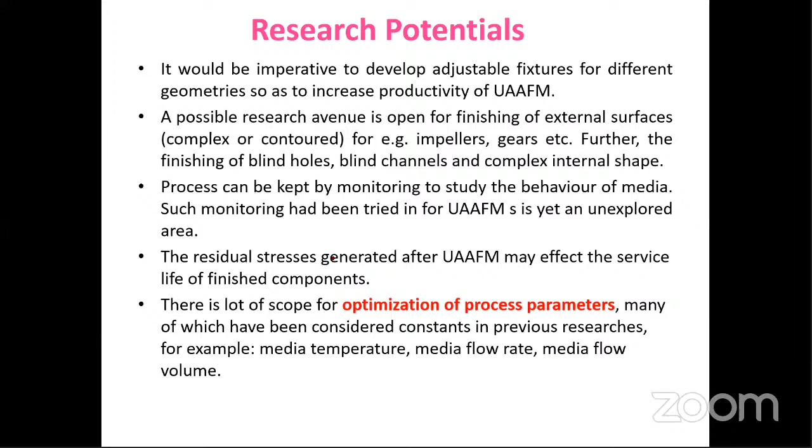We can use various tools for optimizing the process, and we can do a lot of prediction on the developed processes, which is also a research scope. These are the uses.